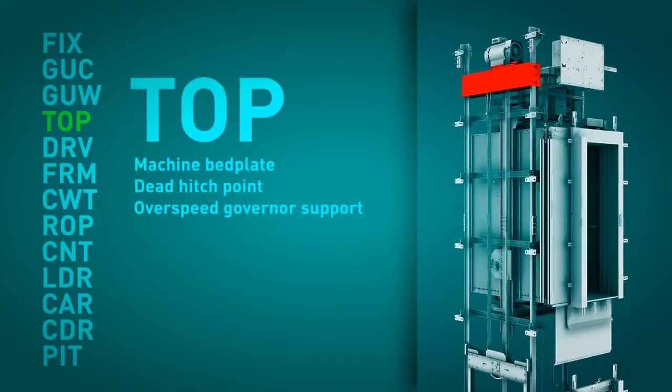Each module can be made up of one or more packages. These packages are identified with a description of the module and its position within the assembly sequence. The supply of the elevator has been designed to fit what we consider to be the logical assembly sequence of a machine roomless elevator.

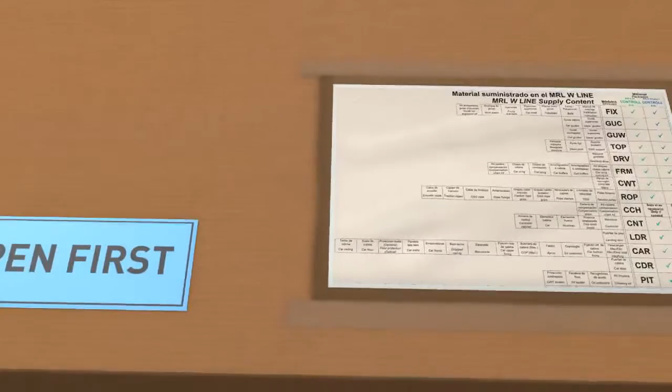The package that we have to open first is labelled and easily identifiable. Attached to this package, in a protective plastic cover, is the packing list and a document which details and lists the material supplied in each of the various modules.

In this first package, we can find the assembly manual of the elevator and all the assembly handbooks of the individual components. Before starting the assembly process, we strongly recommend the assembly technicians read all the manuals in detail.

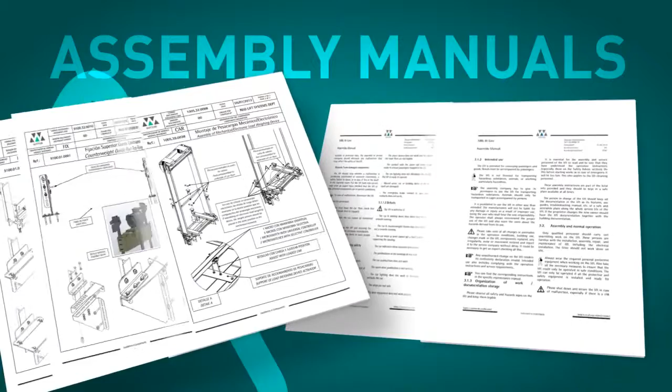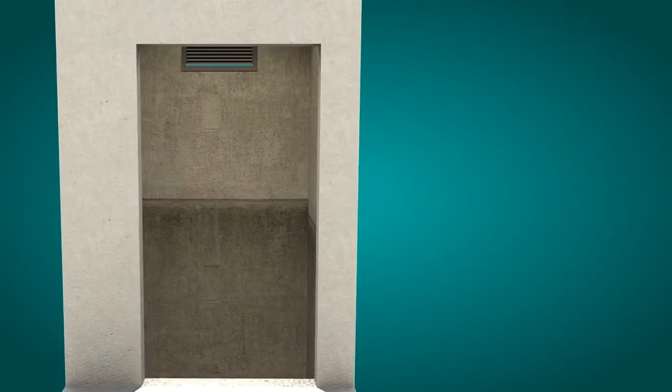The assembly of the MRL-W line starts by checking that the conditions of the shaft, dimensions, cleanliness are satisfactory and that all the necessary material and auxiliary tools are available on site. The guide rail sole plate must be correctly positioned and levelled according to the assembly manual.

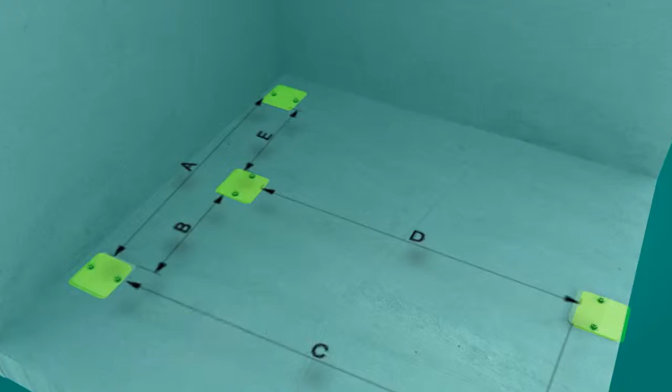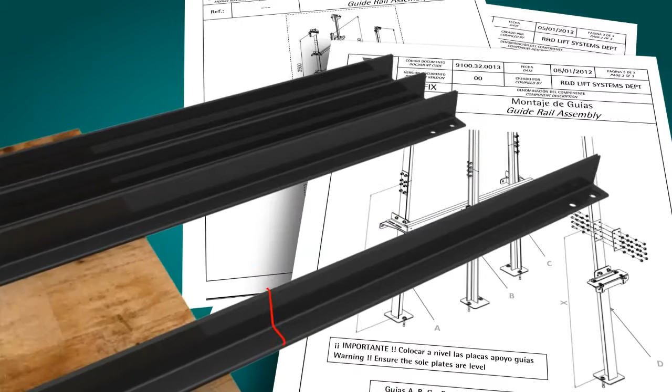The bottom portions of the car and counterweight guide rails are cut and assembled according to the installation drawings. Should there be a difference between the pit depth given in the installation drawings and the as-built depth, the bottom guide rail can be adjusted and cut to the right length.

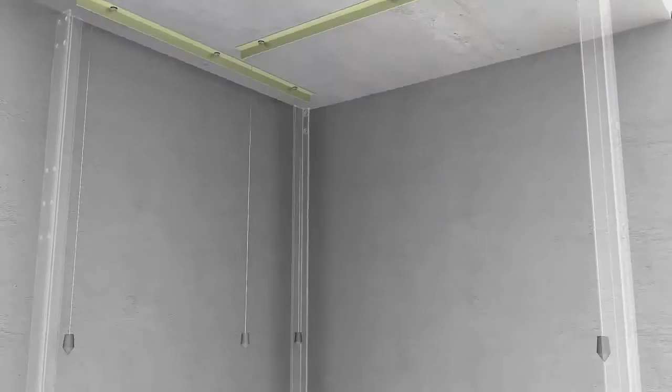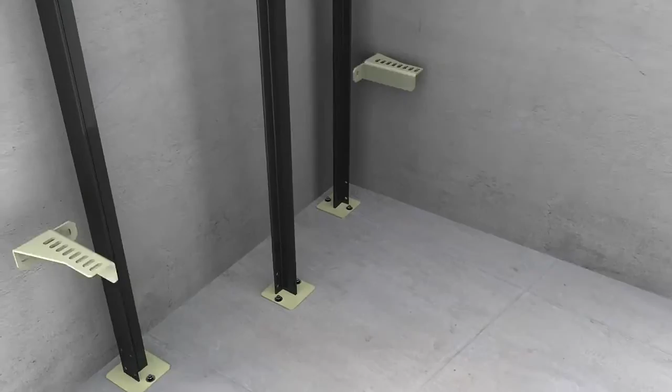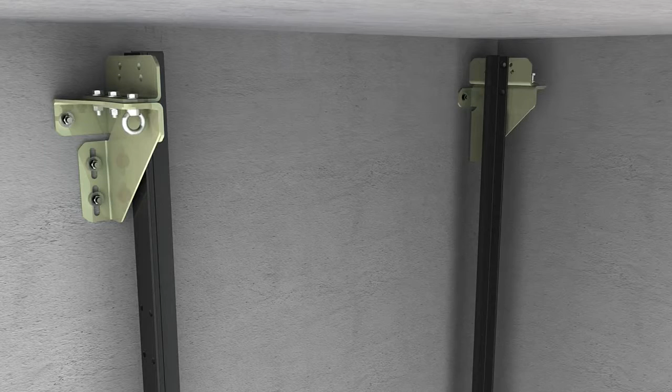With the help of some scaffold platforms, the successive guide rail portions, 2.5 meters or 5 meters, are assembled with their corresponding support brackets. Once the last section of the counterweight guide rail has been assembled, the topmost bracket can be fixed into place. The last portion of the car guide rail fixed to the bed plate is assembled once the machine support has been installed.

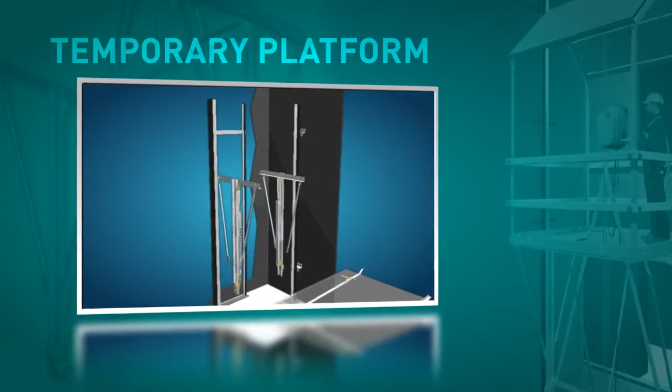Alternatively, the process of assembling the guide rails can be carried out from a temporary platform which is fixed to the guide rails that have already been mounted and lifted up through the shaft by means of a block and tackle.

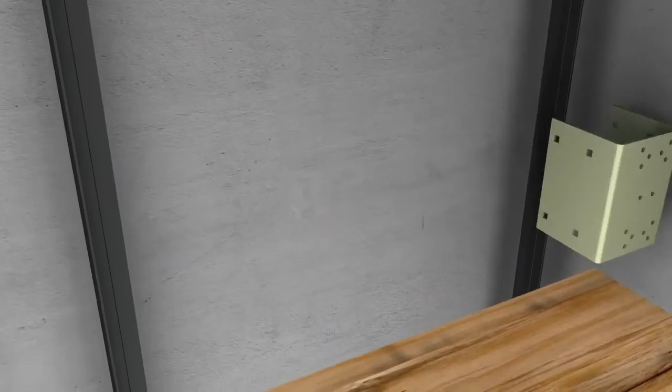The machine bed plate is assembled next. A comfort kit is standard supply for 1.6 meters per second, but optional, though highly recommended, for 1 meter per second. These low-frequency metallic cushions absorb any vibrations that the system may produce.

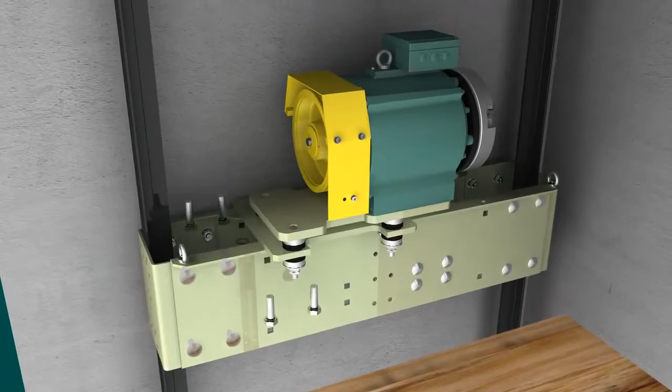The machine is fixed to its support and is lifted and guided into position with the help of a block and tackle. It is fixed to the sheave side with the fixings provided, and once the machine is level, these fixings and the clamp can be tightened. Once the machine is in place, the penultimate guide rail support and the last section of car guide rail, fixed to the bed plate, can be assembled.

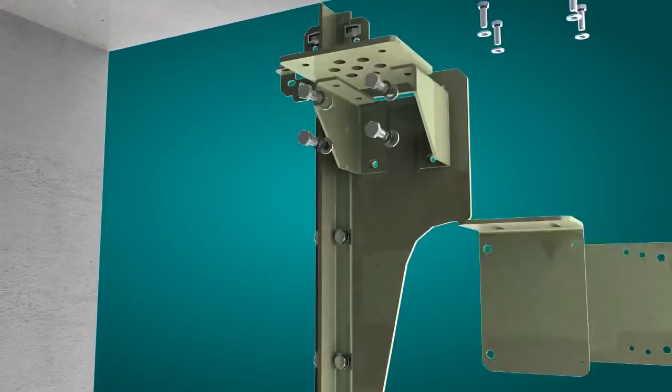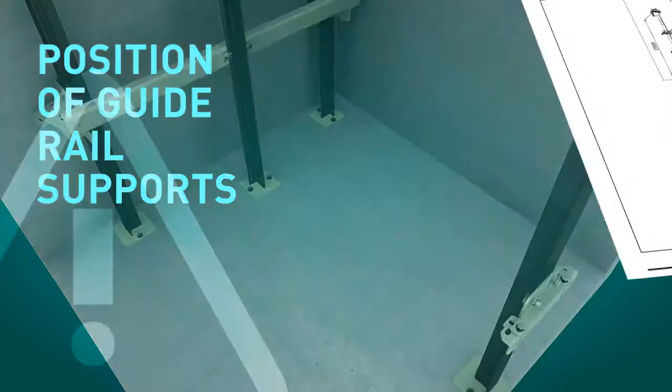The dead hitch point can now be assembled, followed by the overspeed governor and the slack cable control device, should it be applicable. At this point, all the mechanical elements of the elevator are assembled in the headroom. All the guide rail supports must be placed in the positions detailed in the installation drawings. The position of the top and bottom brackets is of special importance. Any scaffolding and platforms should be removed at this point.

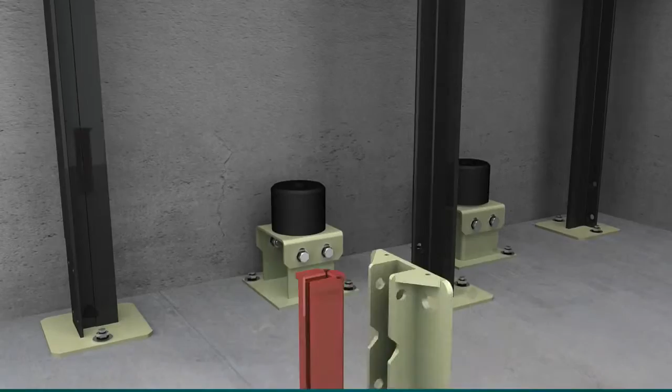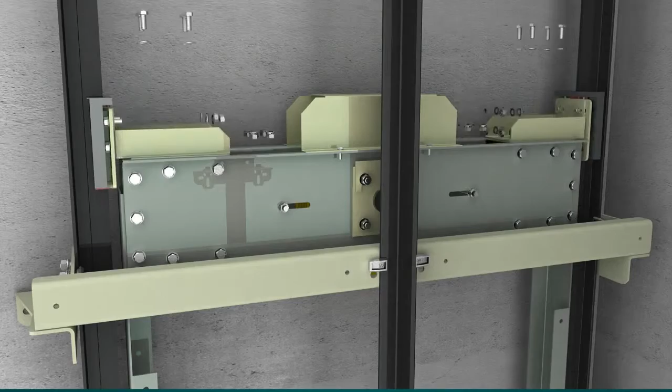It is now time to go into the pit. In the module FRM, we will find all the components relating to the car and counterweight frames and the buffers. The counterweight buffers should be assembled first of all in the position detailed in the installation drawings. Resting on its buffers, the counterweight frame is then assembled. A partial loading of the counterweight should then be carried out.

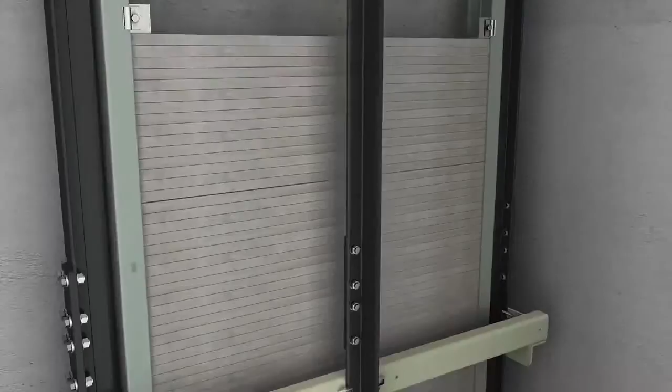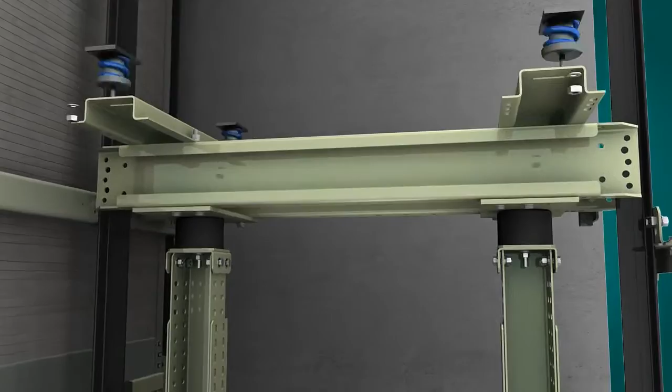The car buffers are assembled next in the position detailed in the installation drawings. Resting on its buffers and on the car floor, the car frame is assembled. As an optional accessory, Vita offers a temporary protection to protect the car floor whilst the assembly process is taking place.

The slings are now correctly assembled and positioned within the shaft and between the guide rails, and it is time to suspend the car slings in order to assemble the traction ropes. All the necessary material is supplied in the module ROP. The machine should previously have been connected to the power with the encoder cable.

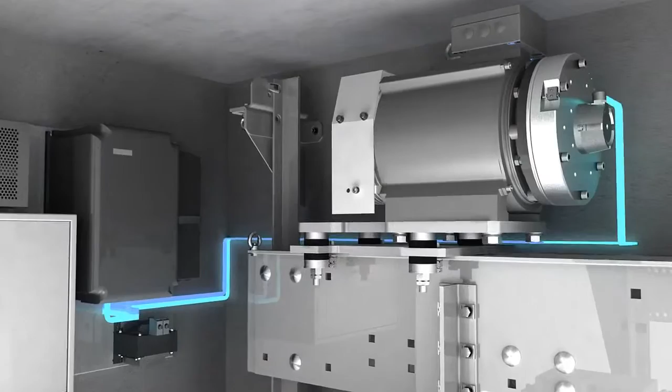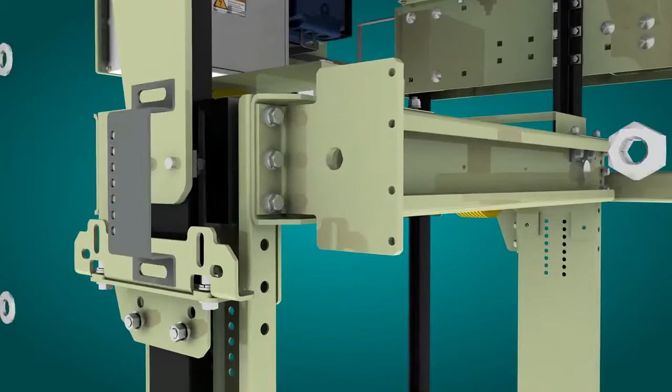The car sling is then lifted with a block and tackle to the highest floor that allows the floor of the car to lie flush with the landing FFL. Its position is maintained by means of the car frame locking kit. This element has not been designed to specifically suspend the car, but to fulfill the function indicated in clause 6.4.3.1 of the standard EN 81-A3.

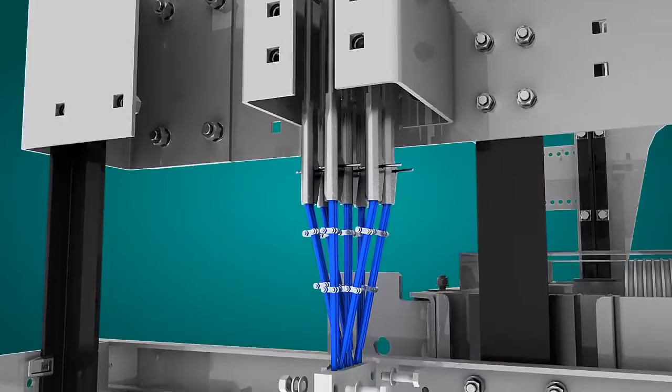For the assembling of the traction ropes, please follow the instructions detailed in the elevator's installation manual. Repeat the process as many times as needed. A rope clasp guarantees the correct alignment of the ropes as they are fed into the groove of the sheaves.

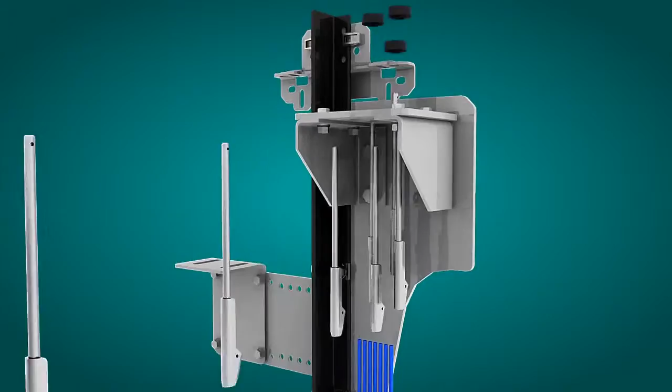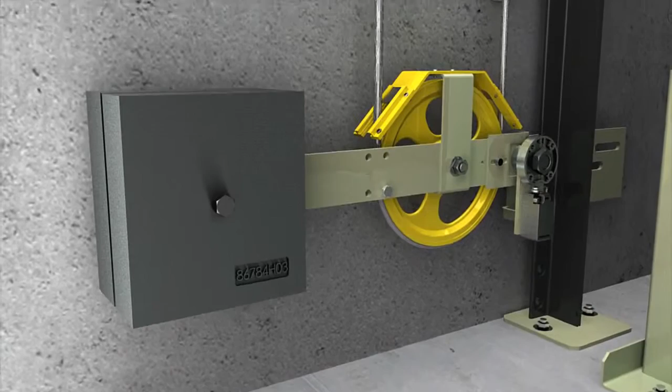The next step is the assembly of the overspeed governor, its tension weight and the cable that joins them. The fixing of the overspeed governor cable to the frame is the last stage of this sub-assembly. At this stage, the elevator can be used as an elevating platform with the use of an assembly operating panel. The elevator must be handled with great care during these journeys.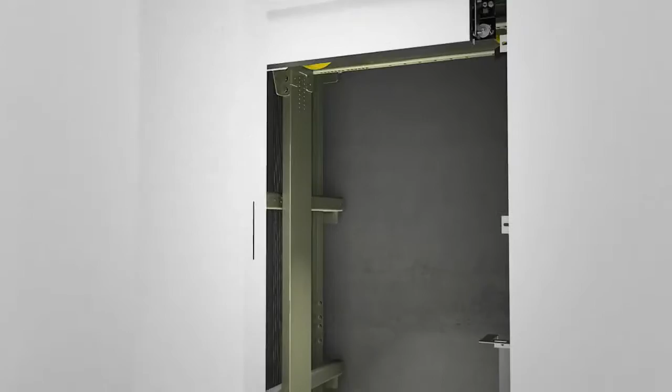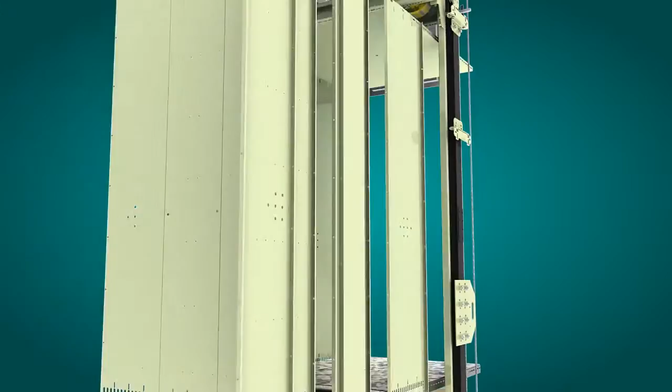With the help of the elevating platform, the landing doors are assembled. Before starting the assembly of the car, it is essential to mechanically block the car frame and to remove the floor protection should it have been used. It is now time to assemble the car door.

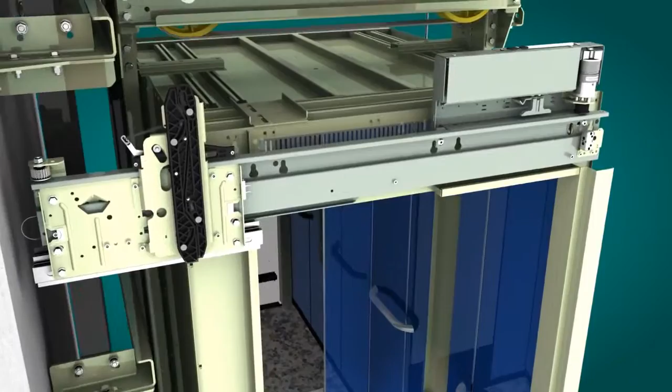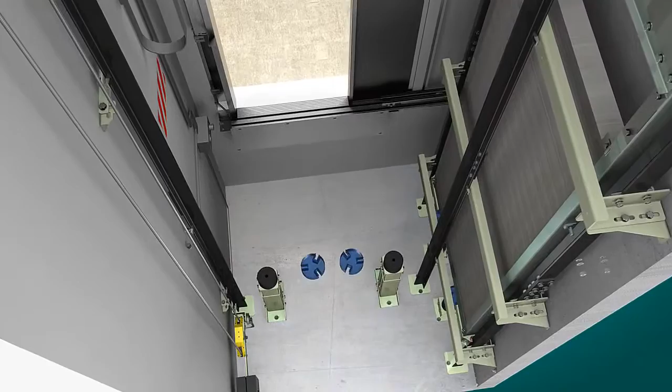The pit components can now be put into place. The counterweight screen is fixed to the guide rails, and should it be applicable, the pit ladder is fixed inside the pit. From this point onwards, the electrical elements can be assembled.

The MRLW line controller, with its plug-and-play concept, is probably one of the market's most easy and intuitive controllers to install. It is delivered perfectly packed and identified in 4 packages: power and control, pre-assembled electrical installation of the shaft, electrical elements of the car, and the controller cabinet. In each of these packages there are various assembly kits, each one accompanied by a description of its contents and an assembly manual, numbered according to the assembly sequence.

The controller cabinet, with its reduced dimensions, is placed neatly in front of the frame of the landing door located on the last floor. The simplicity of the controller does not reflect its features. The MRLW line controller can be supplied also according to other standards, such as EN 81-70 and EN 81-73. Upon request, it can also be adapted to the EN 81-71 and EN 81-72.

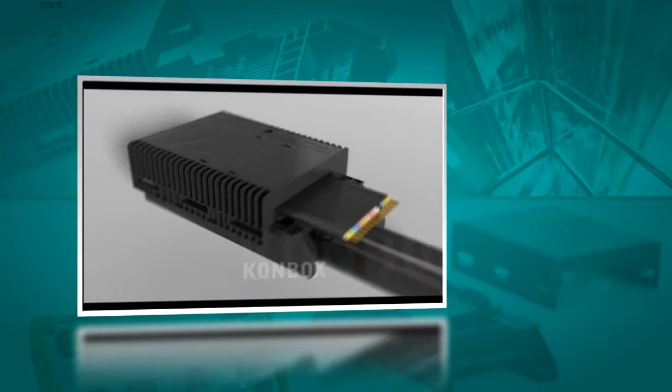Our pre-assembled electrical installation uses the KONBOX system, which greatly reduces the assembly time, guarantees the quality of the CAN bus signals, and sets us apart from our competitors. The flat cable is manufactured with highly resistant and durable materials, which guarantee an optimal protection of the low-frequency CAN bus signals. An absolute positioning system of the car by means of a 4096 pulse encoder is optional. This makes assembly easier and guarantees millimetric precision of each stop.

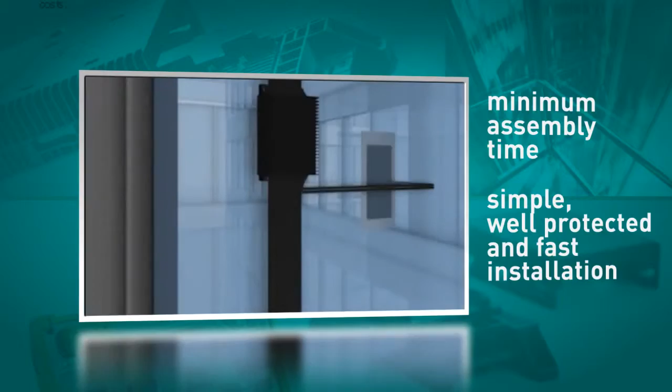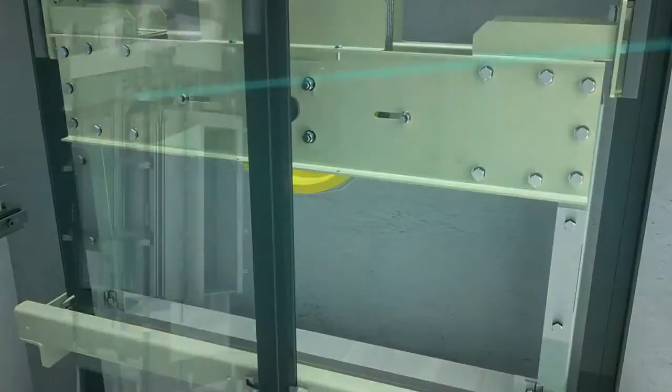The penultimate task is the important one of cleaning the shaft and the pit, and of oiling the guide rails. Finally, before the lift can be put into service, the MRLW line must be submitted to a series of tests according to Annex D of the EN 81-A3 in order to ensure the perfect functionality and safety of the lift. VITA supplies a specific document which guides the assembly technician through all the steps that must be carried out.

VITA has been issued by AENOR a conformity certificate confirming the implementation and maintenance of a quality assurance system from the design, manufacturing and final testing of elevators, and certifying that it complies with the requirements of Annex 1 of the Lift Directive 95/16/EC. This means that any assembly company with a quality assurance system compliant with the Annexes 12 Module E or 14 Module D of the Lift Directive 95/16/EC can put the lift into service and certify it accordingly.

VITA can also supply the necessary documentation allowing any assembly company without a quality assurance certificate the possibility of certifying the elevator through an external notified body according to Annex 6.